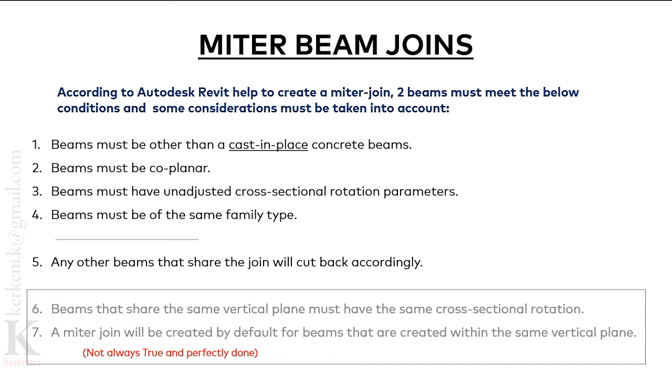So, the question now: is it possible for two cast-in-place concrete beams to be mitered with each other? That's to say, can two cast-in-place concrete beams meet in a miter joint? My answer: yes. It's possible to miter join cast-in-place concrete beams in Revit. In addition, a miter joint or a square-off joint will be created by default.

This is even possible for non-coplanar beams, beams having adjusted cross-sectional rotation parameters, and for different family types of beams. This is interesting. As you can see, this custom-made family transgresses almost all the limitations of the other beam types, such as steel and wood beam.

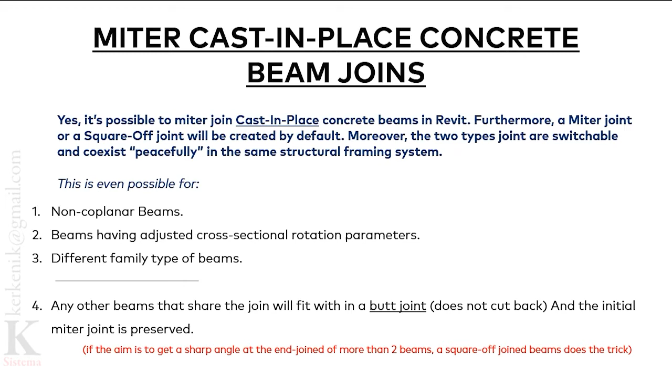This is a simple opinion. When it comes to joining cast-in-place concrete beams, in my opinion, neither square-off joint nor miter joint is technically correct. You may check over this modest opinion, maybe I'm wrong.

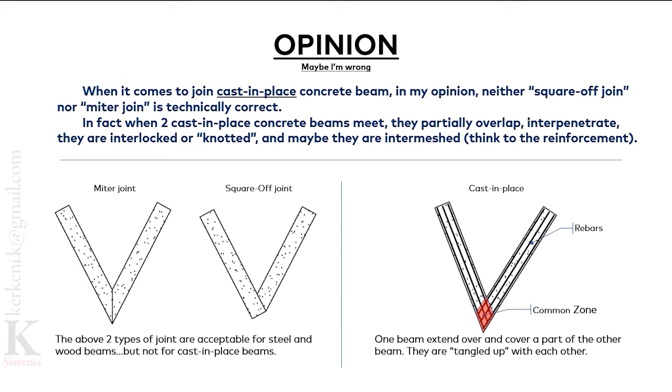Okay, let's examine the behavior of this custom-made family once used in a project. I'm gonna place one beam and enter edit family mode. This is a modified family of the standard one that comes with the Revit library.

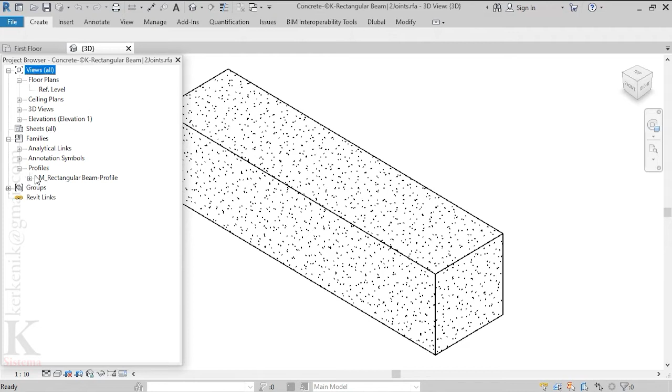There are no nested families except an already existing family profile. I have not changed anything to its properties, especially for material behavior. I have not changed it to another type like steel or wood. I just added a simple yes/no parameter to the family.

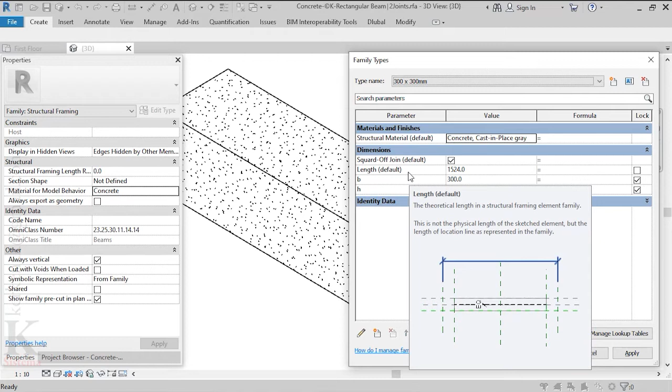As displayed in the tooltip, if enabled, beams fit together in a square-off joint. If not, they fit in a miter joint. There are no math formulas.

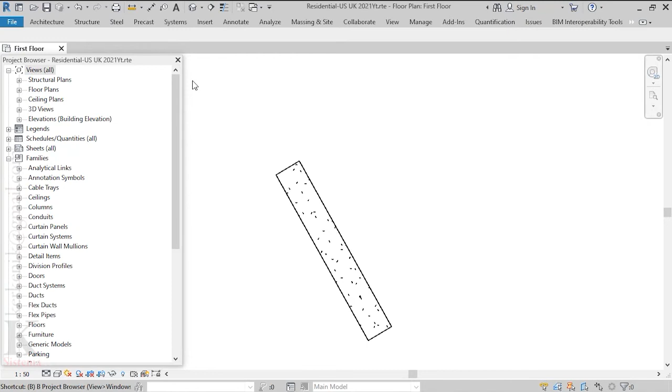Let's connect another beam. To switch to a miter joint, select one beam - no need to select both beams - and uncheck the square-off joint parameter. This way, it will fit with adjacent beams in a miter joint.

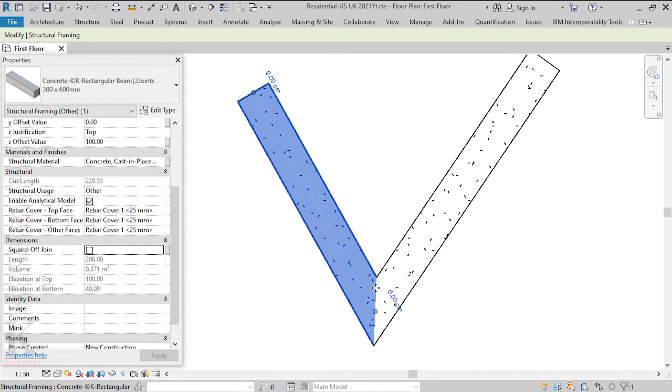So, if the square-off joint parameter is enabled, beams come together in a square-off joint. If not, beams come together in a miter joint. That's all. I just want to unjoin geometry to make the joint visible. Notice that the beams stand connected.

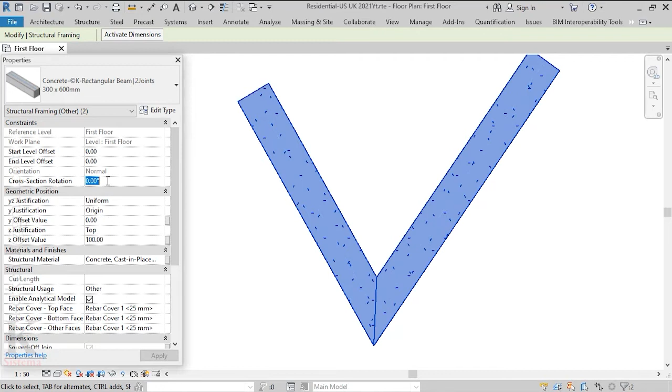Now I'm gonna change the cross-section rotation to 25 degrees, for example. Notice that the beams stand connected in a miter joint, even though the cross-section rotation was changed and the beams are no longer coplanar.

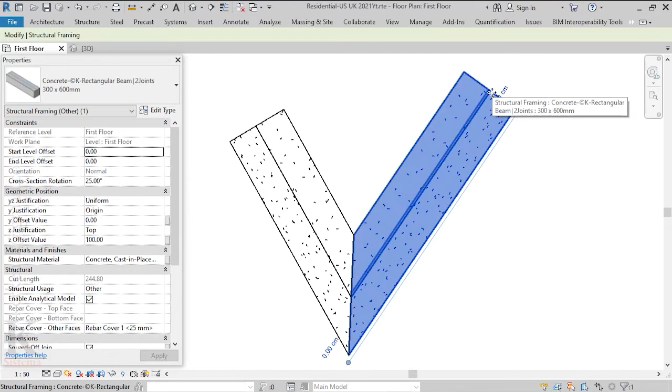Let me now raise the two free extremities of the beams to the same level offset of 50 centimeters and watch what will happen. To get the best result, beams must be equal length. As you can see, the miter joint stands.

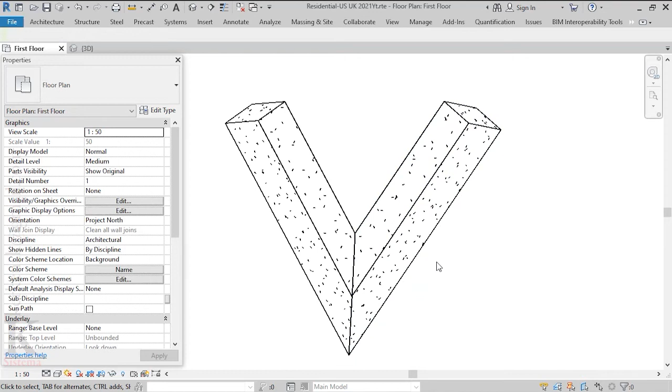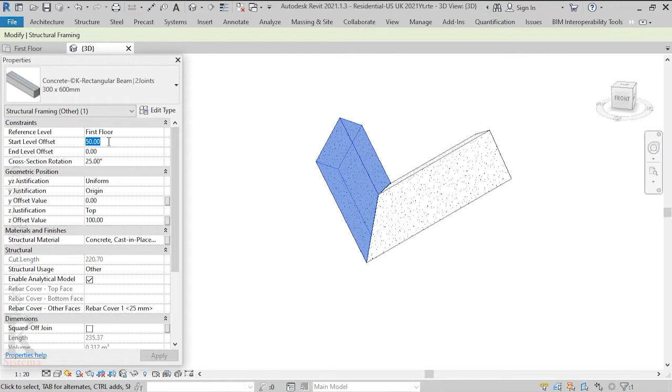I want to just lower one extremity. This is the case where one extremity is lower than the other. It's also the case where beams have the same extremities offset values but different length. Okay, this is not technically correct.

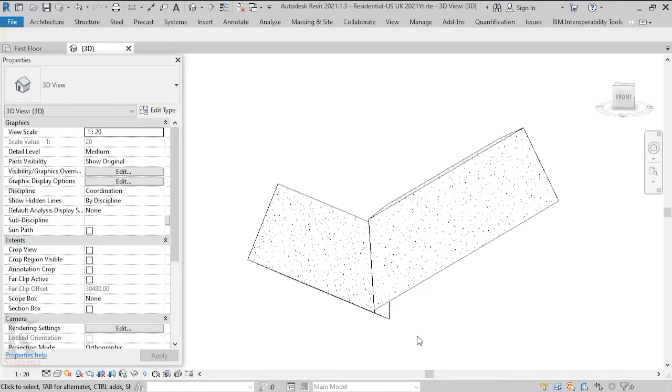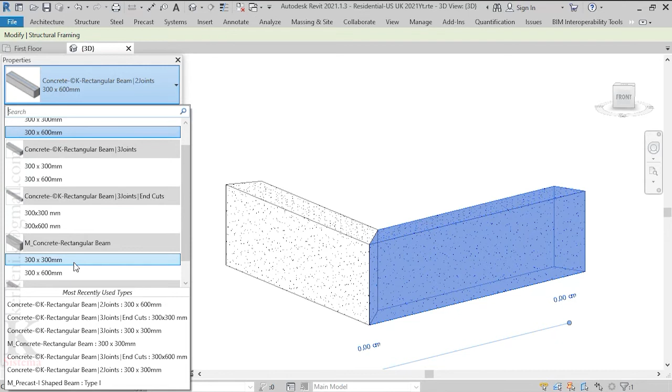Let's take back the beams to the initial state and replace one beam instance with not only a different type, but a different type from a different family. I'm gonna take this beam that comes with the Revit library. As you can see, the beam stands connected in a miter joint.

This is not possible for wood, steel, and precast concrete to maintain connection between different types of beam. Unfortunately, where one beam is deeper than the other, this is not technically correct.

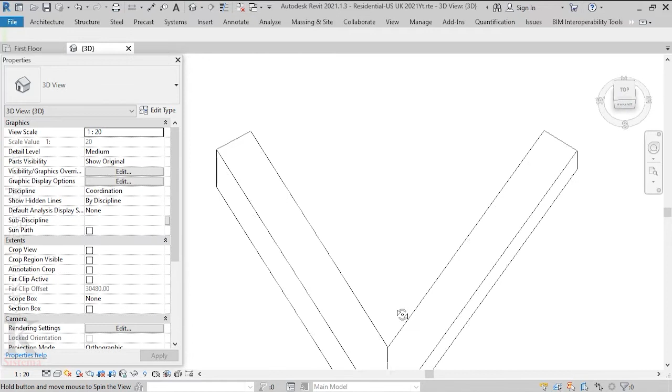What else? Yeah, I forgot to mention some other features of this family. One of them is the possibility to cut back geometry at the end of joints. To illustrate this feature, I'm gonna use an advanced version of this family.

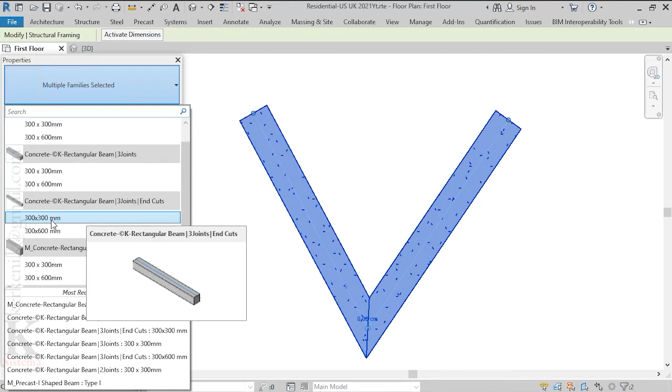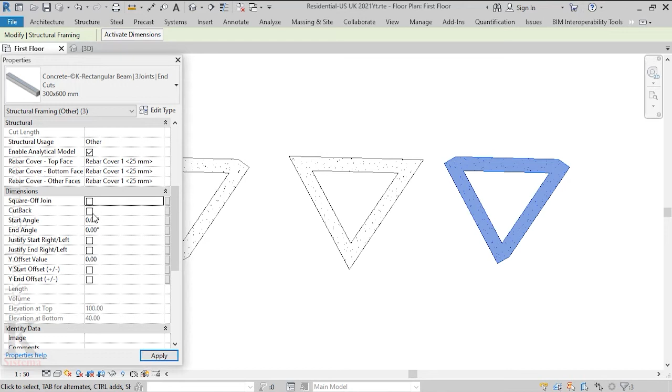For the first set, a miter joint is created by default. Check the square-off joint parameter to switch to a square-off joint, and finally check the cutback parameter to cut back geometry at the end of joints. Moreover, we can combine two or more joint types in the same framing system.

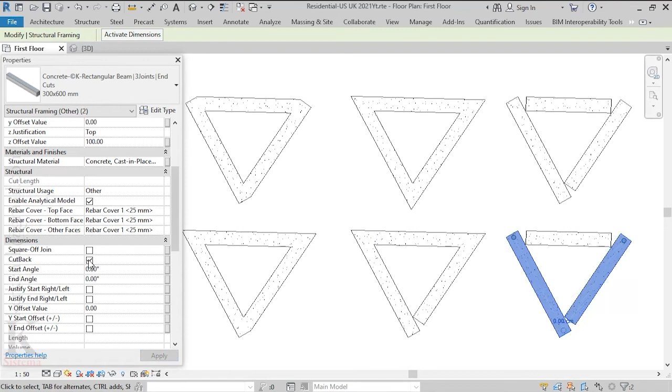You know that you don't need a family like this to create a miter joint. All you need is 2 or 3 seconds, just the time to make 2 mouse clicks. At the end of this video, I will give you a very quick and simple trick to create a miter joint.

Okay, these are some instances of the same family type. It's up to you to judge this.

Another feature is the possibility to define the start and end edge of the beam as an angle. To better understand this feature, I'm gonna draw a structural slab and place an edge beam. What I want now is to align the edges of the extremities of the beam with the edges of the slab. To achieve this, I need to supply the correct values for start angle and end angle parameters.

Then check off the Y justification center origin parameter if Y justification under the geometric position group is equal to center or origin, and check it if not.

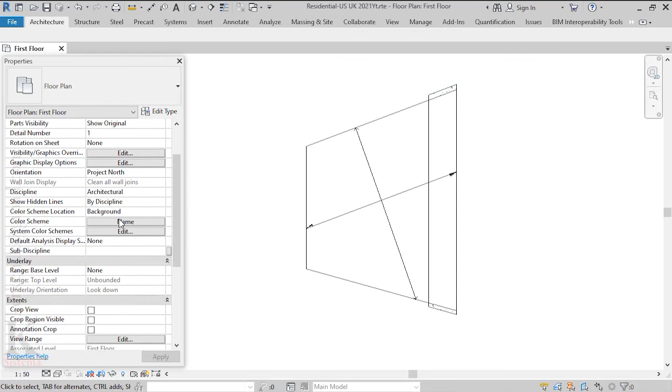Now, if I change the Y justification from origin to right or left, the beam extremities and the slab edges become misaligned. To realign them, uncheck the Y justification center origin parameter, and then according to cases, check or uncheck the justify start right/left and justify end right/left parameters.

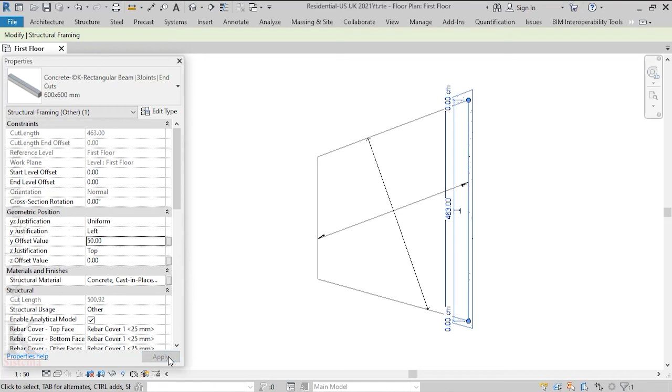Suppose now that the Y offset value was changed to 50. Another realignment is needed. To fix that, just supply the same value used previously for the Y offset, and according to cases, check or uncheck the Y start offset and Y end offset parameters.

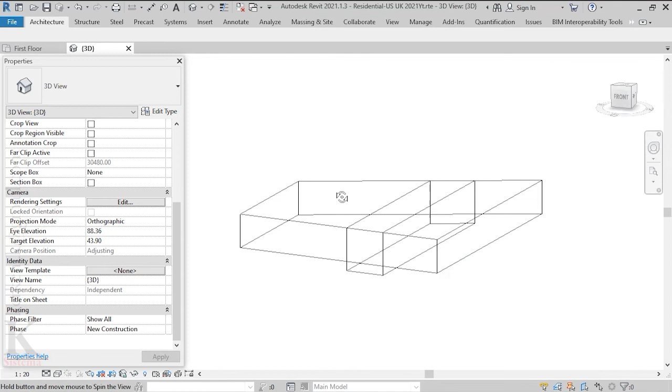As I said before, I'll give you a simple trick to create a miter joint. I'm going to place a standard beam.

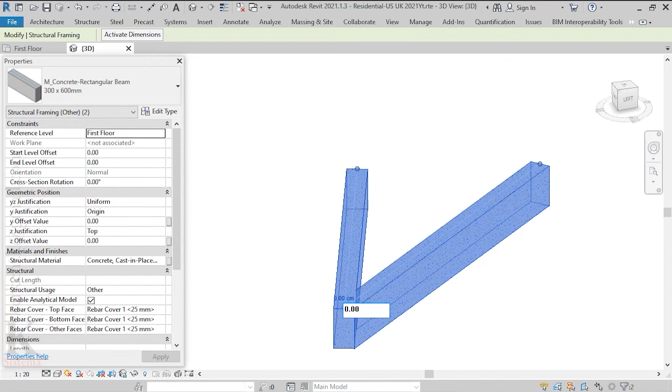Okay, now just select the corner beam and raise the end level offset by 0.001 centimeter or less. Or simply add the digit 1 at the extreme right of the end level offset value.

I just want to undo the change and repeat the process. Thank you.